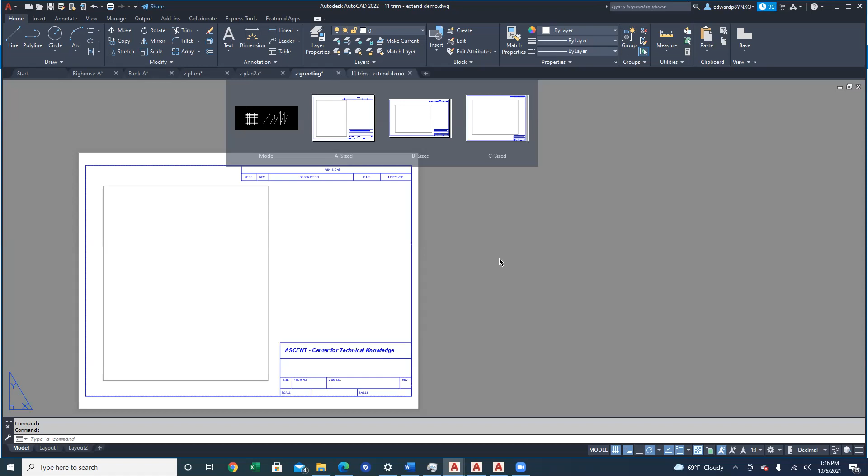So where's my trim and extend? Come on, be nice, be nice. We're going to look at trim and extend in a minute. Oh, come on, what's going on here? Third time's a charm, right? Mine's gone. You can do it. There we go. All right, so where am I?

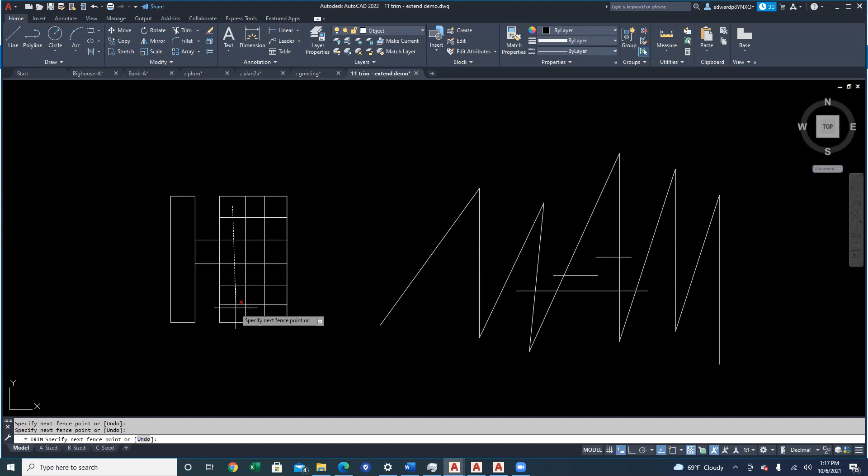Trim and extend, they're both in the same place. The new thing with trim is that you can just draw through. In the old version you had to actually pick. And in the older version, if you had pieces left that didn't cross any cutting line, you had to go in and individually pick them, end the command to get back into trim or delete and individually pick them. You're still in a remove sort of command now.

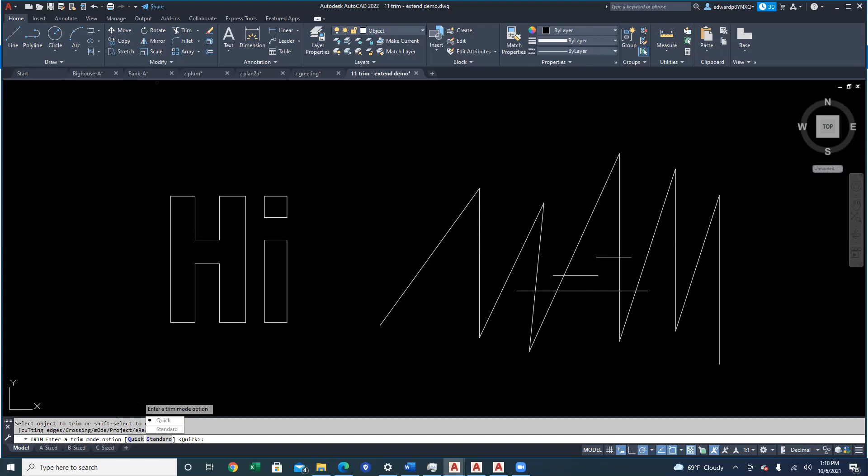If you don't like this, you can always come down here where it says mode, click on mode, and go back to standard. See, go into trim, go to mode, go to standard. Now you're selecting cutting edges and selecting what you're going to remove. With the old version, you hit enter and made everything a cutting edge. So I'll leave that there.

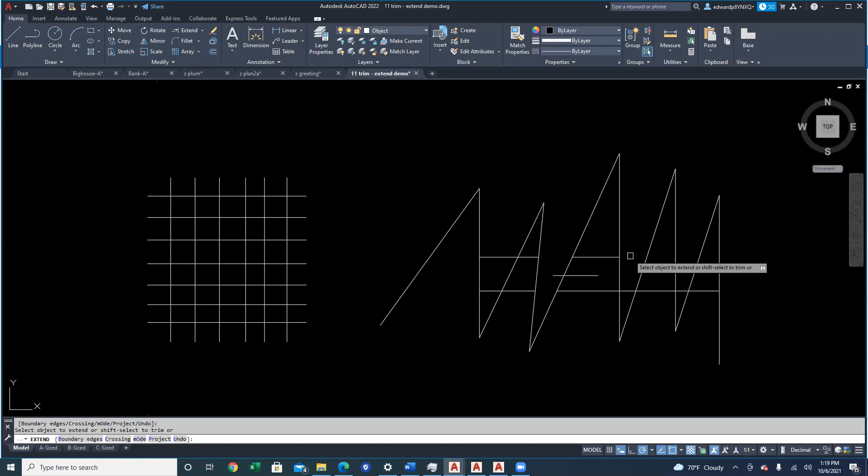The same idea works with extend. Everything is an extend-to line, which if you wanted to extend these all the way out, could be a pain. Another little thing you may not know: if you're in extend like I am now, and you hold down the shift key, it becomes the opposite and now it's a trim. If I let off the shift key, we're right back to extend again. It works the same if I was in trim.

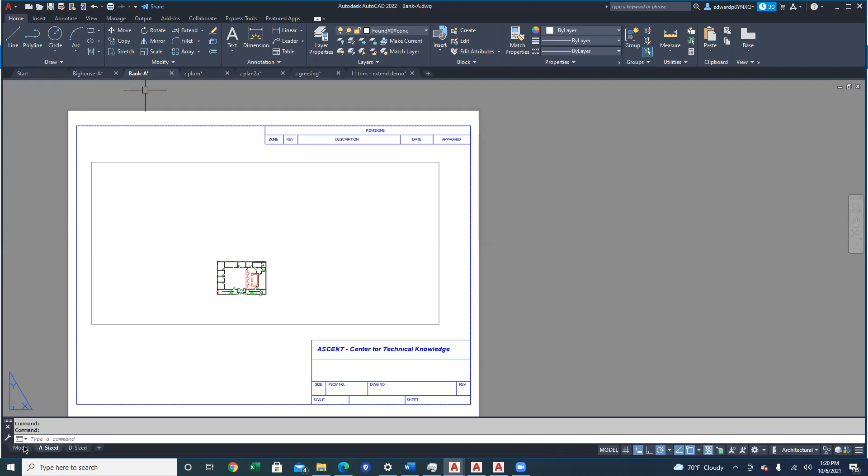Bank. All right, there's a couple of new things in the measure commands. They've added this quick measure so that when you click on that and move into an area, it recognizes objects and gives you the distances in between. So that's new, that's pretty sweet.

If you click in a closed area, then you're going to get the area, the volume of that area. And if you hold down the shift key, you can add to that. Prior to this, you had to come in here and do the area command.

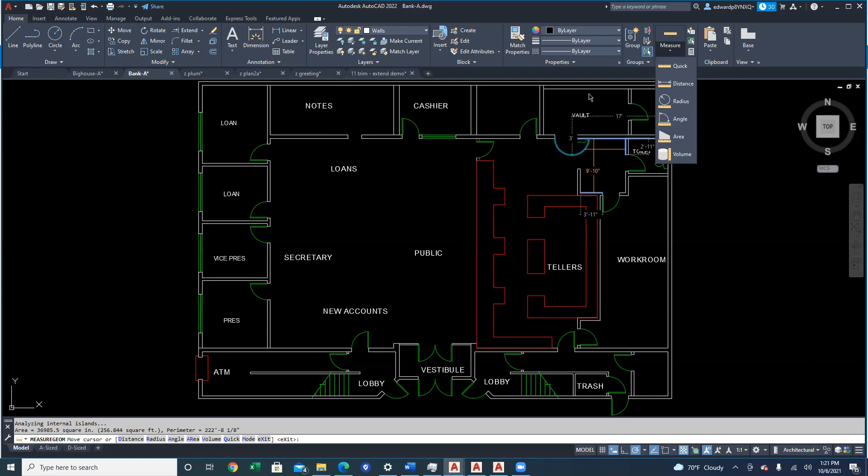One of the other things listed there is the XREF. So if you've got external references that you're using, you can go in and edit them.

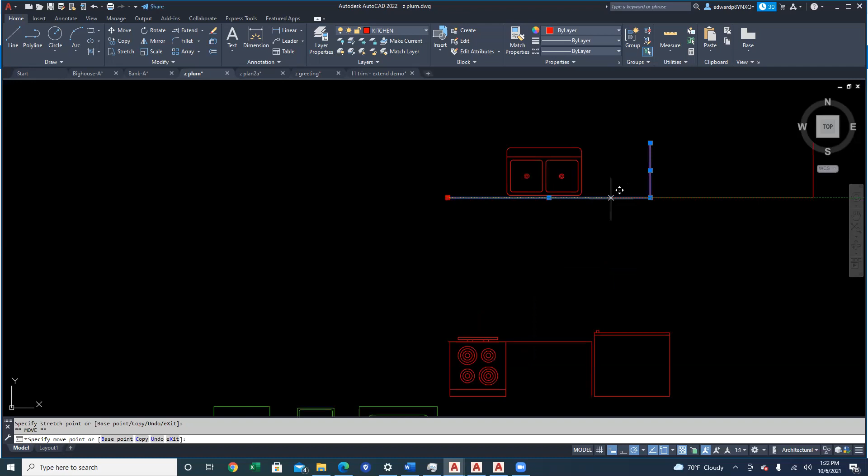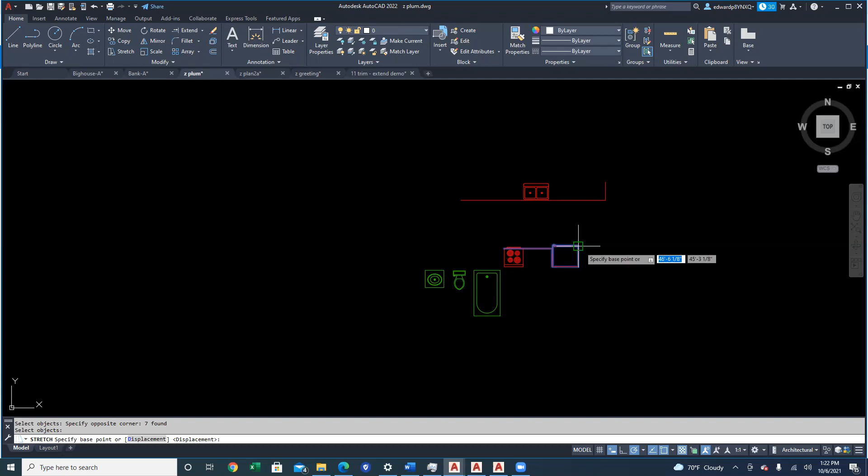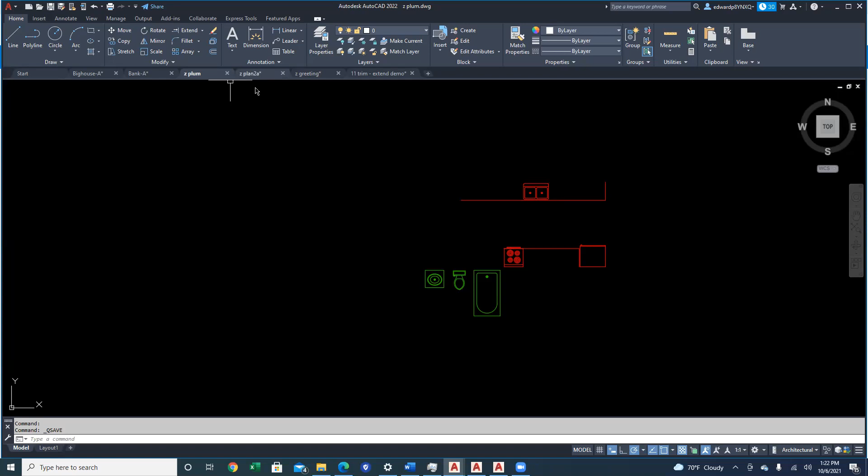I'm using grips. If you're not familiar with grips, it's one of my favorite tools. I should have the background for this. I don't. Let me go to Sketch. Okay, so you've been working on an external reference and you save it. Whoever is the supervisor, whoever is working on the overall plan, opens it up and gets this notification down here, and the compare changes is on by default. If you click on reload, you get into this window and it shows what has been changed.

So what was in the red, what is in the green - it lets you compare the two, and you can work between these. Let's say okay, and you can see it updated it, moved this stuff out a bit. You're wondering why it's not bright - it's because it's an XREF, so it's held down a little bit. You can change the amount that this shows.

What else? You've also got a drawing history. So if in the past you saved the file, you had one backup file. Now when you save the file, you have multiple files that are just listed automatically. You can click on compare, and you can see, turn on, turn off various things, and see what changes have been made, if any.

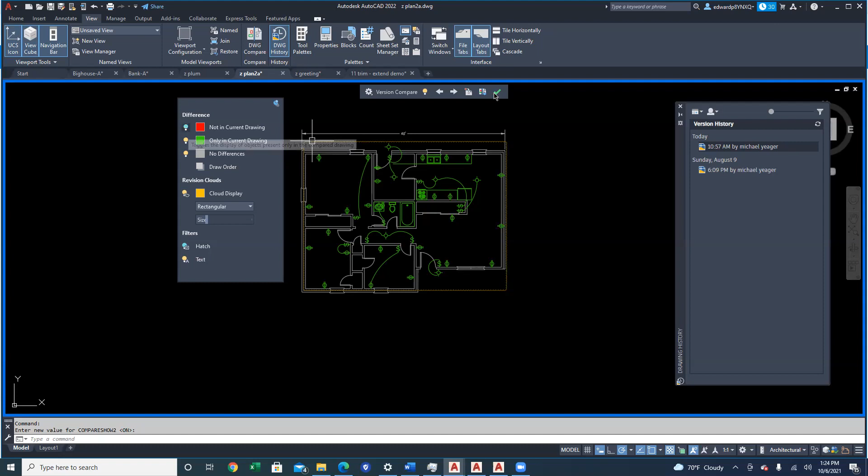And you also have a drawing compare, which does a similar thing. You can pick other drawings - so what was this? This was this.

Let's get out of this. The other improvement, if you want to call it that, is the blocks palette, which I'm still trying to get used to.

When you click on one of these, it opens up the palette, and you've got what's in the current drawing. You've got recent blocks that you've used, and I don't know how far back this goes. You can set favorites, and you can go to the library and open up files. One of my favorite tools is Design Center for dragging and dropping blocks in.

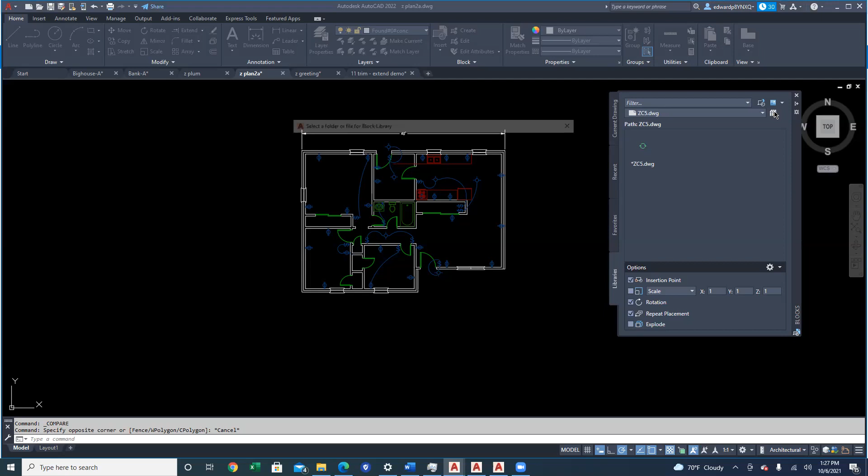So you can come into the library and find a drawing, basically doing the same thing from here. Maybe not. You can find any drawing and open it up.

The thing I don't like about it is with the old version, the old way of bringing in blocks, you brought in just the blocks. But with this, you're bringing in everything - you're bringing in the outline or the title block or whatever else is there. I don't know why this is taking so long.

One of the sweet things, and you could do this in older versions, was rotation. You could turn on rotation so that when you place it down, you could rotate it. But this is new and this is pretty sweet. So grab it and do here. Come on. Come on. Love it when it works.

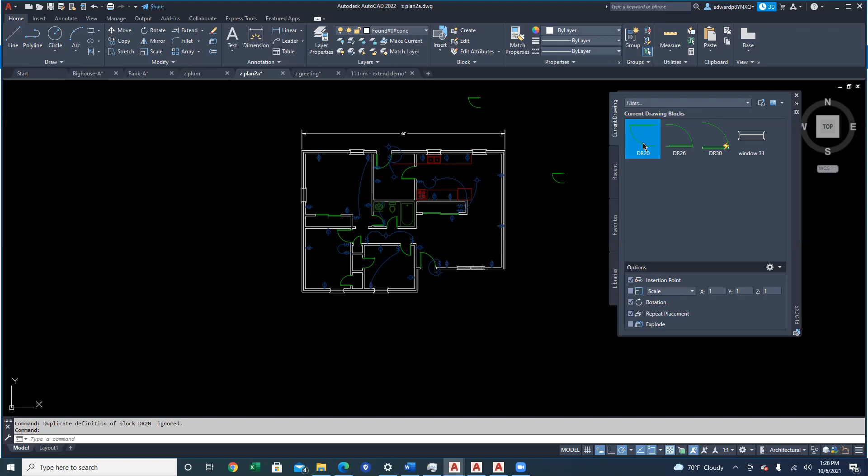There we go. Lay here, I don't know why. Should be right on my cursor so that I can place it down and rotate it. And this is on here. All right. Okay. Let me go. Something else.

I don't know if you saw a little message I got. I don't know if you get this, but it said that I'm running out of resources. One of the fringe benefits, and I'd say that tongue in cheek, of AutoCAD is that they take the RAM that they use when you close out some stuff - it doesn't give it up. I'm just going to close out some of this stuff. Maybe it'll help.

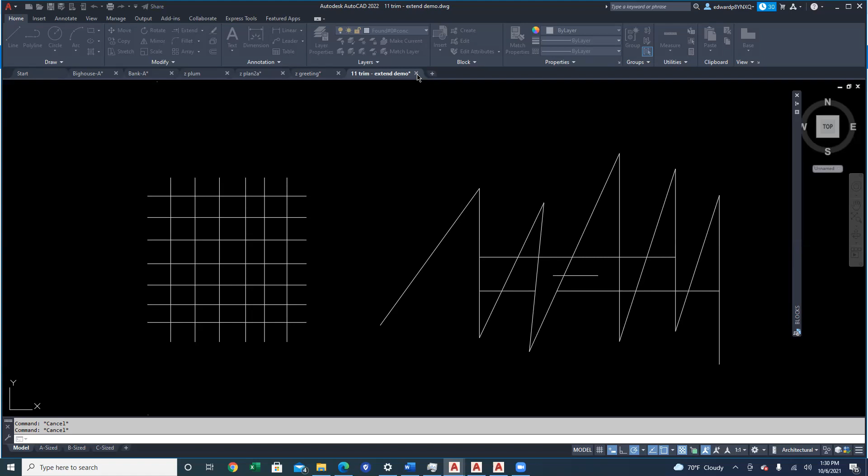Oh. Okay. Okay. Close that. Close that. Okay. All right, let's try something else. Let's go to, what was that? All right.

Let's look at this, start this video. This might be - I might be able to clean this up a little bit. This is one of the better ones that I found. CADD Microsystems isn't bad, so I may just start on this.

So one of the first things you're likely to see when you launch your AutoCAD 2022 is going to be the Start tab. And the Start tab has been here for a while, but it's been sort of streamlined - it's been modernized. Let me pull this up.

One of the things you can do that you might not be aware of is you can go into this little wheel down here and set the speed. I think a lot of these videos, the way they're recorded, the speed at which they're recorded just takes a lot more time. So you speed it up. You watch some of these.

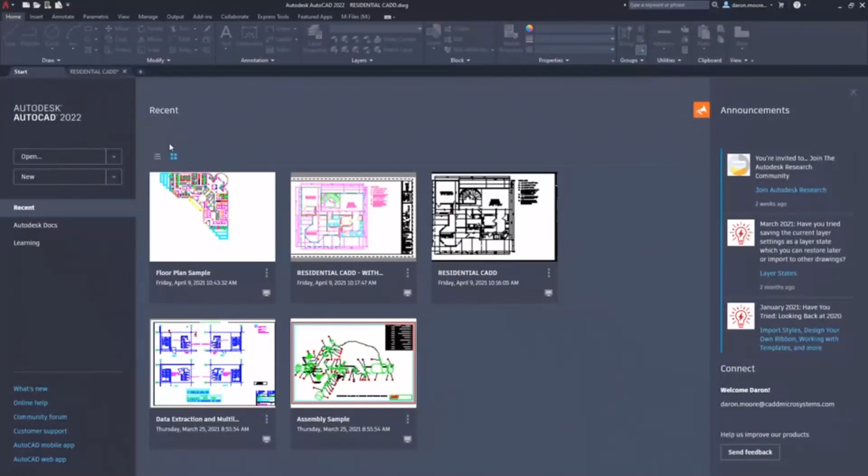Also, you might notice when I hover over a thumbnail, you'll see a little pin icon appear. That pin icon allows me to pin my recent document to the recent documents area. If I go over to details, same thing - if I hover over one of the details, you'll see a little pinned column. I can hover and pin this. A lot of the projects we work on are continuous, ongoing for days, weeks, months, so the ability to pin your document to the recent area of your Start tab can be pretty convenient.

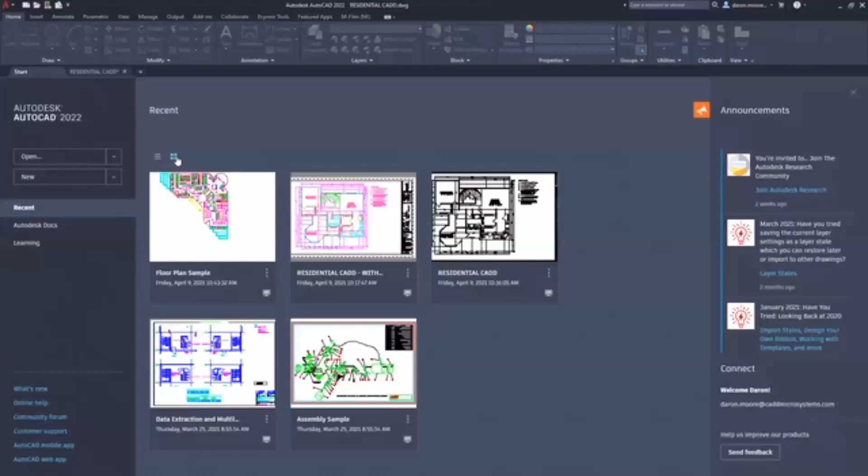You also have the ability to open, on the left side underneath the heading Autodesk AutoCAD 2022, the open button. If I push this, it brings up my select file dialog box, or there's a drop down arrow. If I click the drop down arrow, it opens up and shows me some options. I can open files, open a sheet set, or explore some sample drawings, some of which are shown here already.

Below that is the new button. If I click on new, it'll open up a brand new drawing using the default template, or I can use the drop down arrow and use the default template, browse additional templates, or get more templates online to make my startup a little quicker. I can also create a sheet set - I always find that hard to say.

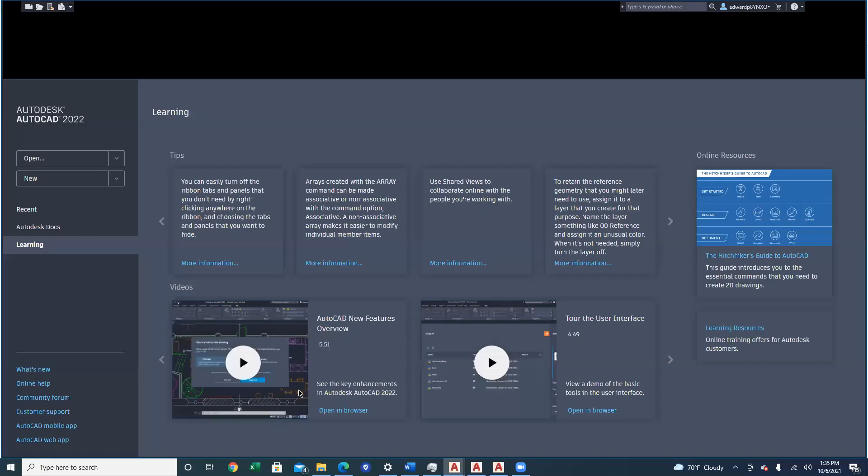I don't know why it's blurry. I guess it's something with the feed and the amount of RAM I have used up.

So if we go to recent, it's going to show all the drawings that are there. Again, you can look at it in different ways. This isn't new - you've been able to do this with other versions in the past. I mean, this is 2021, and it was just arranged a different way.

It's like hemlines and seasonal things. They've got to change in order to sell a new product. So they're changing the way it looks, but it's really not anything new.

2019 is saying I had 2019 open here. It looks the same. 2021, they just changed it a little bit. 2022.

So where am I? You can pin any of this stuff. It just keeps it from being pushed out of the buffer. There's, I don't know how many, 8 I think, in the buffer. The oldest one gets pushed out unless you've got it pinned.

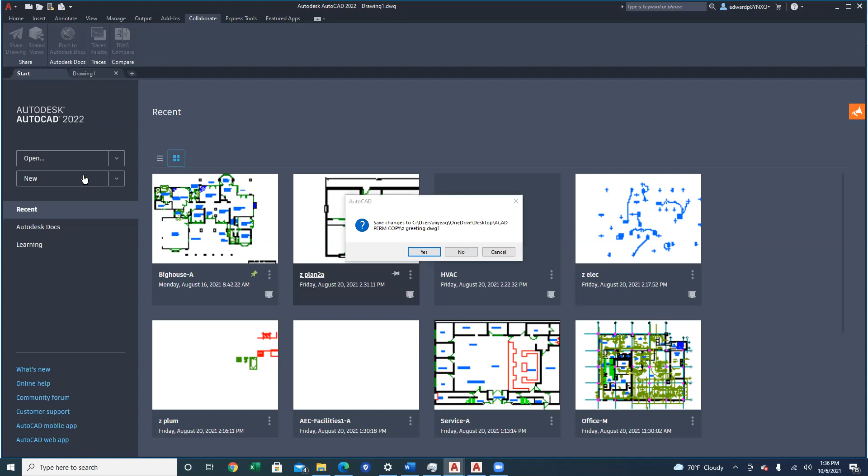You can click on open and open an existing file. You click on new and you get a new file. No, I don't want to save that. No.

You can create a sheet set using that new area there. They're talking about sheet sets, and if you look at the Autodesk programs...

Heading down the line here, we have something called Autodesk Docs. You have the ability to open up your Autodesk Docs if you've connected to it - that's another one of those subscription features, a separate subscription feature. I could open up and see drawings that I may have shared with somebody through Autodesk Docs, which is Autodesk's cloud environment for drawings and data. So I could see drawings that I have shared or had.

A little problem with my feed here now. Damn.

Okay. Wonderful. All right. Well, something unusual just happened. Let's see. What I'm going to try and do is turn this off through the Task Manager so I can get back and open it up again.

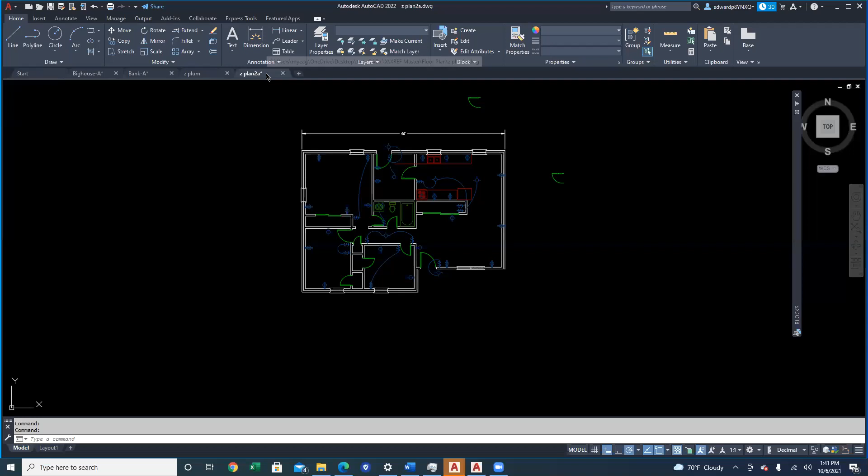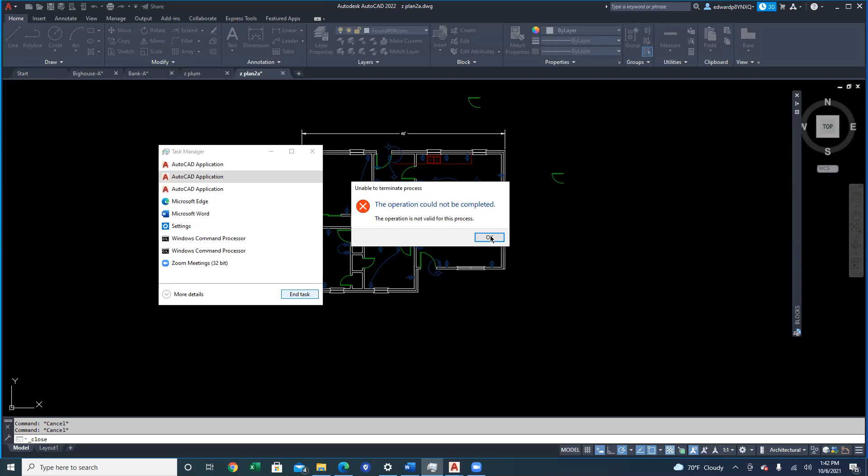So with Autodesk Docs, you can go out and share stuff. No, I don't want to save it. Okay, open this up again, see if that helps. Doesn't help, that's for sure.

Shared with me, below Autodesk Docs, is the learning area. If I click on learning, it changes the landscape here where I can see the top row with a bunch of AutoCAD tips. If you like to grow your knowledge of AutoCAD while using it, you can come to the tips area and learn a few new things.

Below that, the next row is just videos in general, and there's a scroll arrow that lets you scroll and see additional videos. The initial one is a new features overview, which we're in the middle of right now, plus tour the interface and so on. This features overview is a little different, so you should probably watch it to get a different perspective.

Videos will help you get up and running. Also presented are online resources for training, for people who offer online training. I don't know how we can get ourselves listed there—we probably should. But there are varied resources for learning information and getting trained up.

Let me go back to that recent area. Below we have what's new—you can learn what's new in AutoCAD. Access help, go to the community forum. The forum is a great place if you're having issues with your AutoCAD; you can share experiences you're having.

I'm seeing this in my AutoCAD—what is happening? And a lot of times people like myself will try to write answers, try to help you figure out what's going on with your AutoCAD.

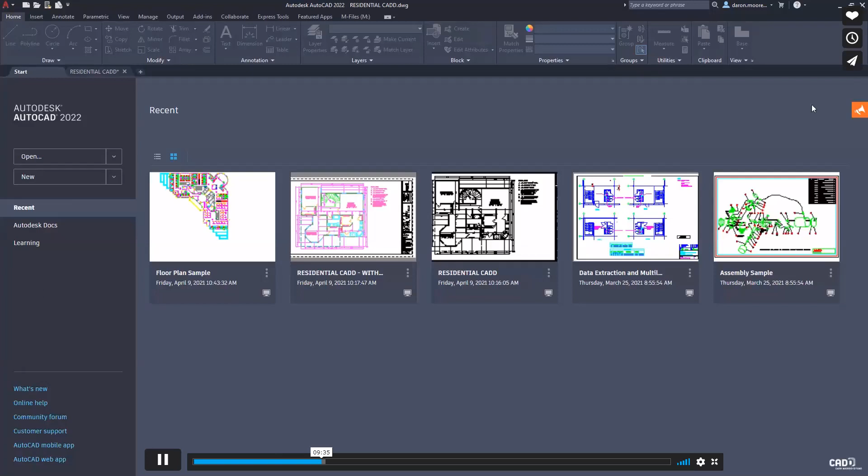Then I want to point out one final thing: the send feedback button. The earlier versions of AutoCAD's Start tab had a send feedback button, and I found it by accident. I was just goofing around on the Start tab, saw send feedback, and pushed the button. It basically allows you to send an email to one, or a very small list of, people at Autodesk where you might have an idea about the software.

I offered an idea. Let's get back, see if AutoCAD is open yet. No, it's still trying to load, looks like. Let's get back here and look at some more of this.

About the trim and extend commands—I wouldn't say they used my idea exactly, but if you've been using AutoCAD since 2021, trim and extend have changed. So maybe my suggestion wasn't exactly what they did, but maybe it helped.

Oh, you go there—so do send feedback, make it constructive. Don't say, hey, make it better. Just say, hey, I wish you could change the command prompt for this, or can you add that?

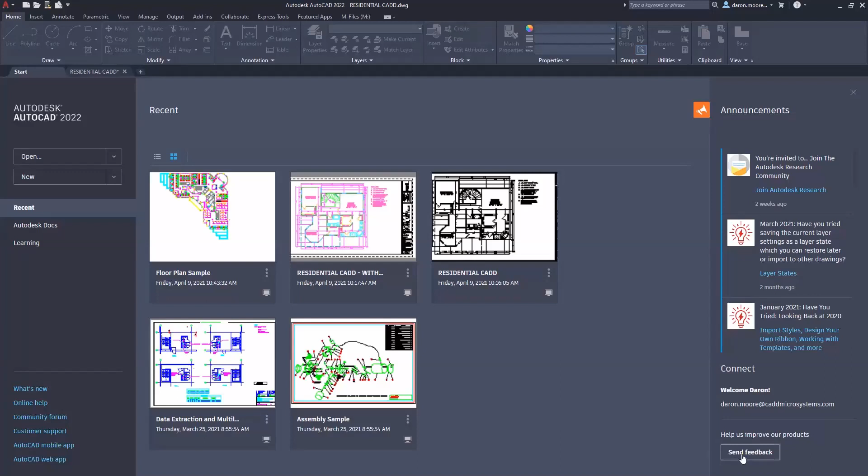And all our feedback, our positive feedback, goes to help make this a better platform for all of us to use. So that's your Start tab, and hopefully you'll be able to take advantage of that.

Moving on from the Start tab, I'm going to switch into a drawing that I opened up earlier. In this drawing, the next thing we'll talk about is one of the new features called Share Link.

Share Link is accessible on the Quick Access toolbar or the Collaborate tab. I think Collaborate is a theme that AutoCAD has been supporting for a while, and it's just continued to be supported. A lot of folks, myself included, are working from home, so the ability to collaborate online is beneficial.

So again, share link. If I want to share a link to this drawing, I can either click share on the Quick Access toolbar, or click share on the Collaborate tab on the share panel. Either way, it's going to give me the same result. I'll click share, and it's going to bring up a dialog box. It takes a second, you can see the little buffering wheel. Share a link to this drawing.

I have two options. One is I can share a view-only version if I want to share this with somebody who I don't want to edit the drawing. Maybe it's a client and I'm showing them, hey, here's where we are with your floor plan so far. I could give them a view-only version of it. Or if I would like my client, consultant, or collaborator to be able to edit and save a copy, I could choose this option instead.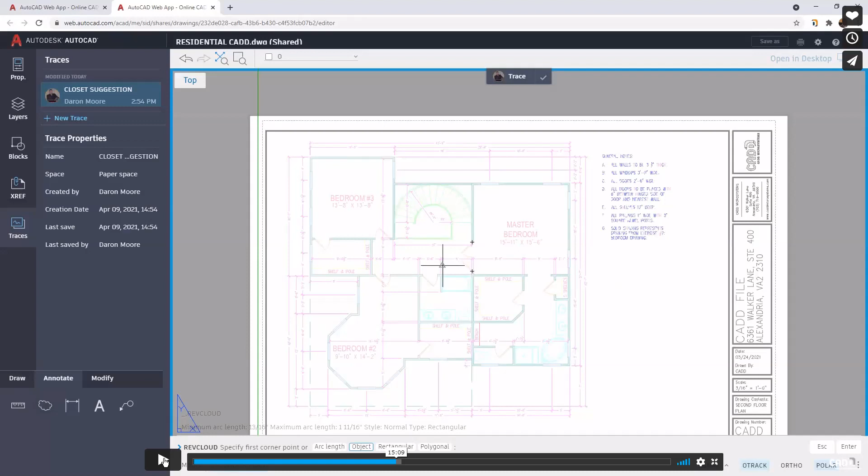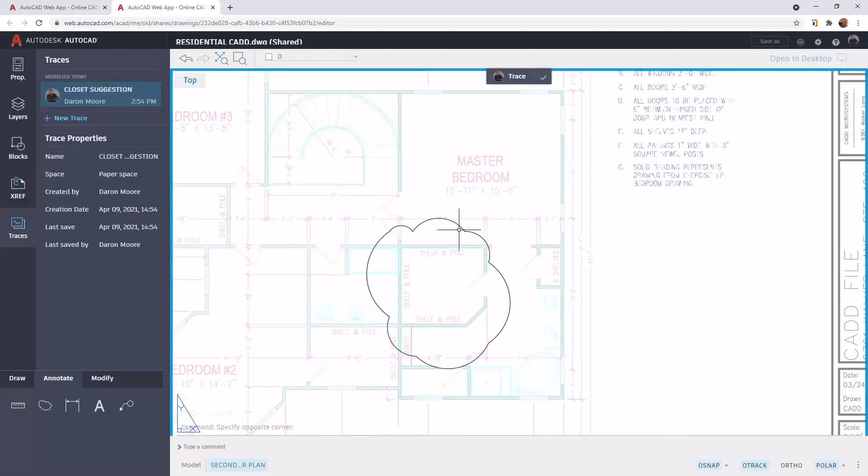So before you place it, you can come in here and change the arc length. The closet in the master bedroom, that's pretty big, like so. Then I'll add some text, and you'll see what I'm talking about with the fonts. If I go multi-line text, okay, this is a huge piece of text. Let me stop this right here. I'm going to do this from model space because the text that I currently have as my text style is model space based.

So I'll go to the Model tab here. There we go, all right, zooming back in, I'll go to my revision cloud. So here's my revision cloud around the closet, and then I'll create some multi-line text.

And I'll just say, you know, my wife would like this comment. You can make the size of the text bigger here. Walk-in closet, something like that. I'll just click check. So there's the information - I'm sort of making a suggestion to a team member.

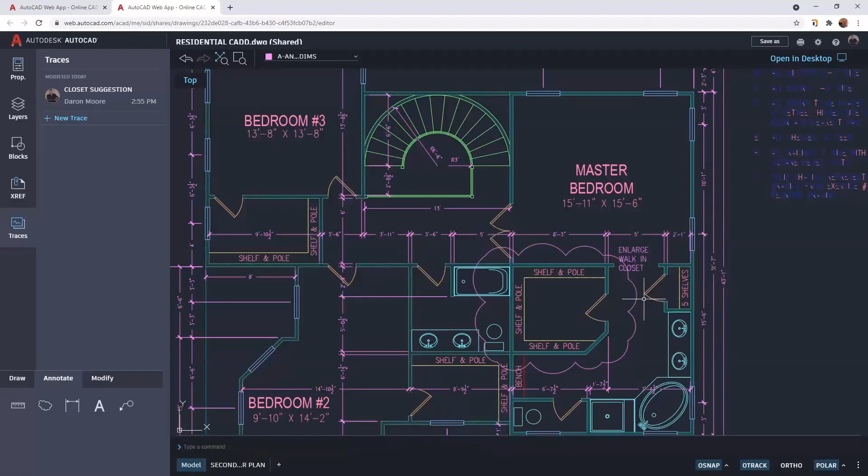Now I'll do the save as. I'll go save as, and I'll just save it to my AutoCAD Web and Mobile, and I'll just call this closet suggestion, or say size, just to give it a unique name. It's closet size suggestion. I'll save that.

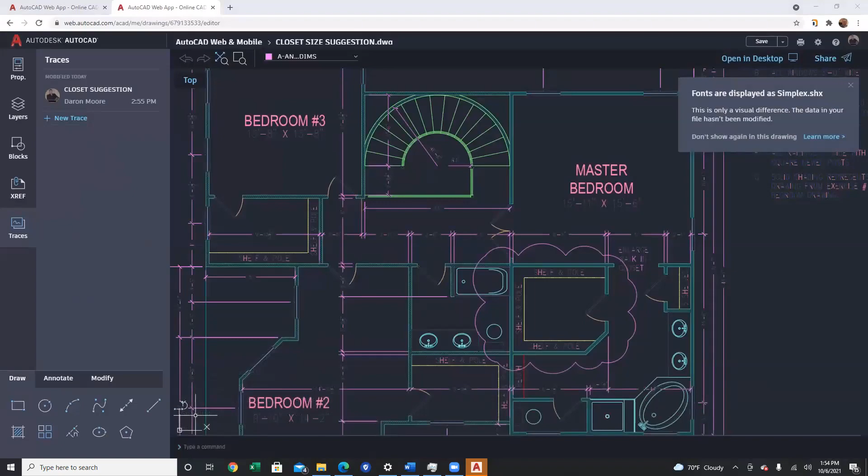Okay, so that was my trace. That was the command trace. And then what I'll do is go back to my desktop version of AutoCAD. I'll get rid of this dialog box. Now I want to see what my collaborator, my counterpart, said about the link I shared. I'm going up to my quick access toolbar, and I'll click Open from Web and Mobile.

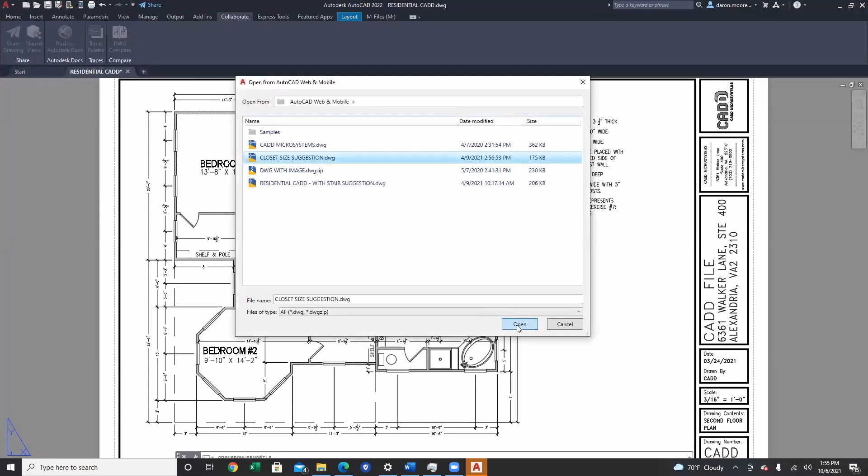And here's closet size suggestion. I'll click on this and click open. All right, so here's this drawing, and you can kind of see there's the little markup there.

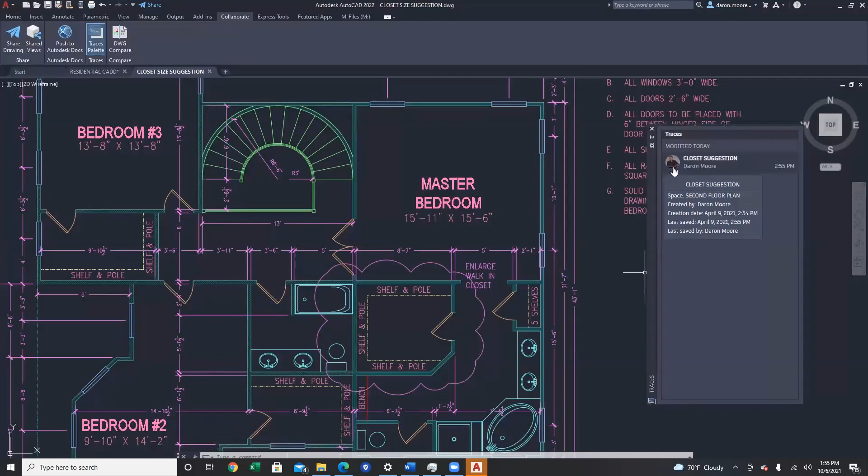Now on the Collaborate tab of the ribbon on the desktop version, there's a Traces panel. If I click on Traces, that opens up a Traces palette, and it will tell me - there's my image, I'm the guy who made this, but if someone else made this, I might see their avatar. I can click on Closet Suggestion, and it kind of highlights it. It sort of puts me in the mode to see it.

You can kind of see almost like you're seeing it through tracing paper. The tracing paper is now on top of the drawing. You have a little toolbar, and again, the toolbar allows you to see who the avatar is - it's very small, but that's me. Then I have the ability to sort of toggle the draw order.

If I click on front or back, now the trace is behind the drawing. Now the trace is in front. And if I make my changes, I can, when I'm done, just hit the little check mark and say okay, I'm done making those changes. So this is kind of another way to collaborate or communicate with other AutoCAD users - your trace and Traces palette.

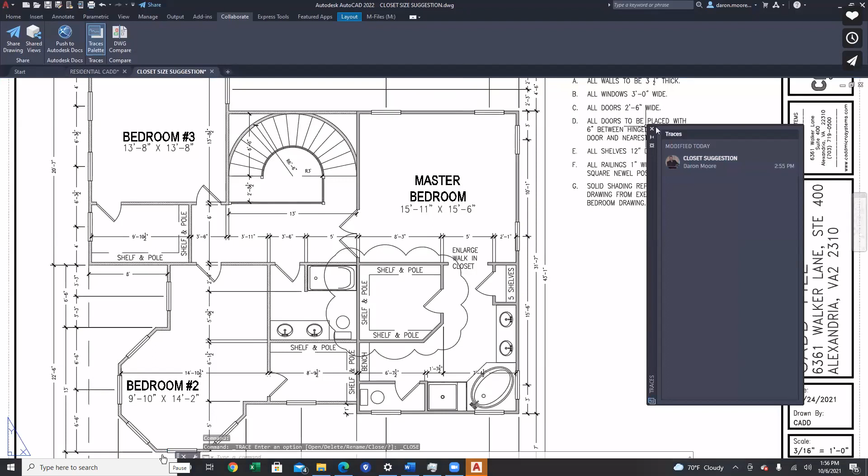Typically this would be a red line drawn right on top of the drawing. The drawing would be shared back and forth, and this would just be right on top of the drawing. So the trace has an advantage.

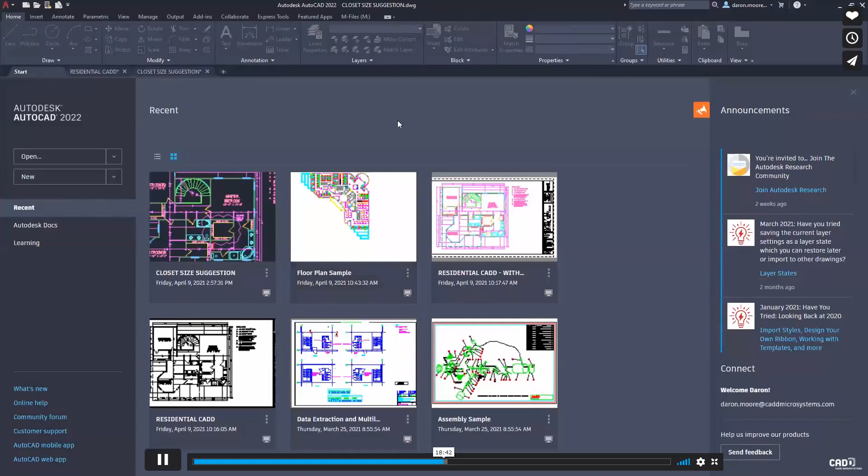This is one of my favorites, a command I'm pretty fond of. I'm going to open up a different drawing for this - a drawing I think was set up exactly or expressly for this new command. This is a sample drawing, and I'm going to open it read-only. If you've had AutoCAD for a while, you've seen this drawing for a while.

This is a command called Count, and the Count command is accessible on the View tab. There have been other ways to do count before - Count is sort of like a data extraction, so this is an improvement. It's in the pretty ribbon suite, it's palette based, and on the Palettes panel, here's the Count button.

I'm going to click count, and this drawing has not been saved, so of course it's read only, but I'll click count, and it gives you a palette. The count palette shows all the blocks in the drawing, with abbreviated names like chair, 7. Computer's not abbreviated, but it shows me all the blocks in this drawing.

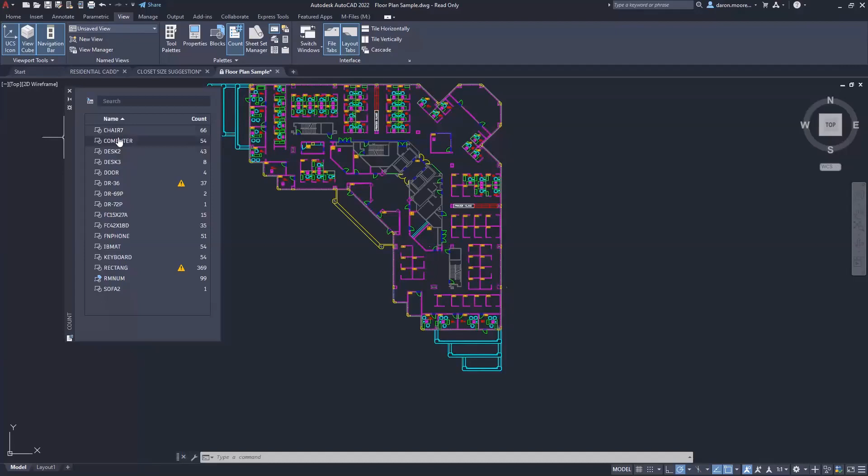If I right click over any one of the blocks, let's say computer, I can review count details. It shows me where these computers are, up in a little toolbar similar to the traces toolbar, and how many there are. I can get a little bit of information, like there's 54 computers.

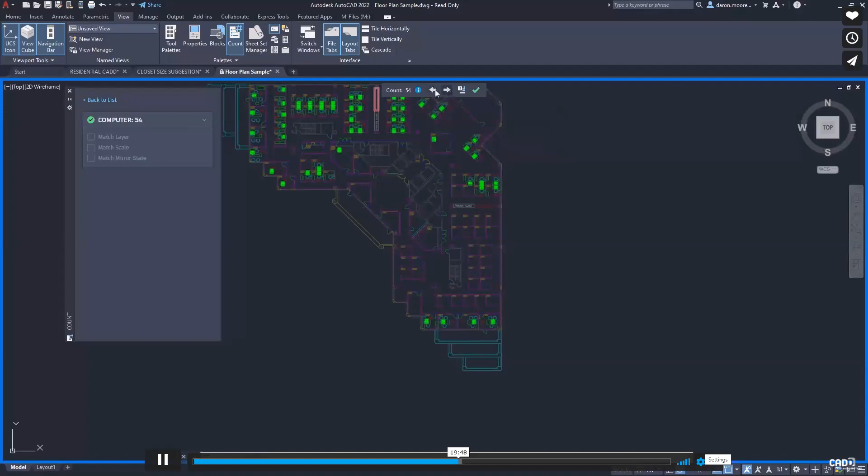If I use these little left or right arrows, they should zoom me in so I can see where they are. If I keep hitting next, it'll show me each one, and you saw them highlighted when we were zoomed out.

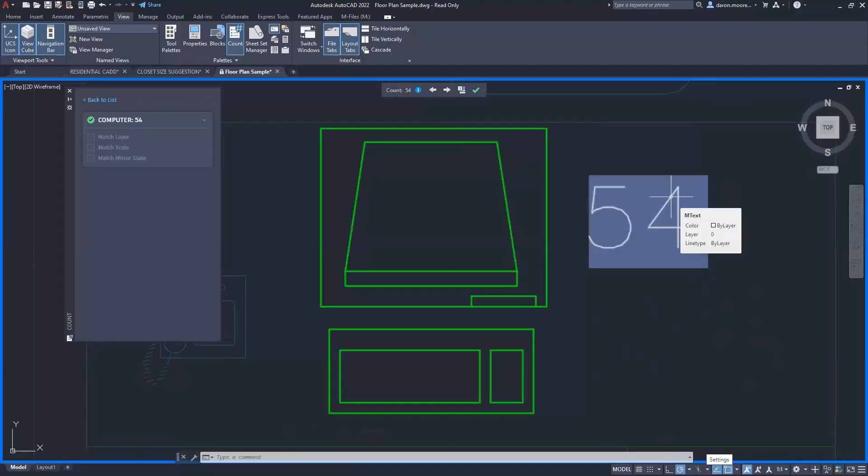The next little icon allows me to paste or insert a count field. I'll click count field. We saw there were 54 computers - my field mask seems very dark, but there's 54 computers. This is dynamic, so if I were to add or remove any computers, that count field would update.

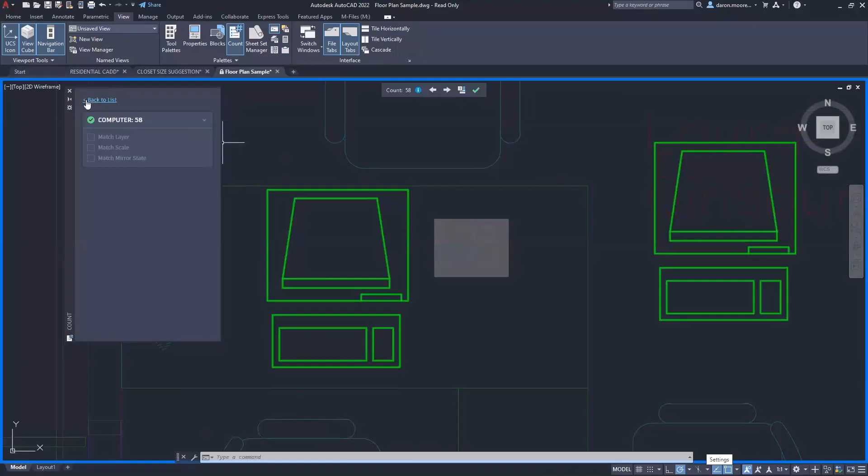Let me left click, right click, copy selection, and make a few copies, so we have a few computers laying around the office now. Going back to that field, if I use regen, it should update and show me now there's 58 computers. This is a cool tool in my opinion - I've used the command called bcount for years. Let me go back to the list, and that's kind of exciting for me to see.

You'll see a couple chevrons here, little triangles of enlightenment - if you use AutoCAD architecture, you may have heard that term. If I click on this triangle, it tells me there's a count error, and if I click on this overlapping object, it's telling me there's an object overlapping.

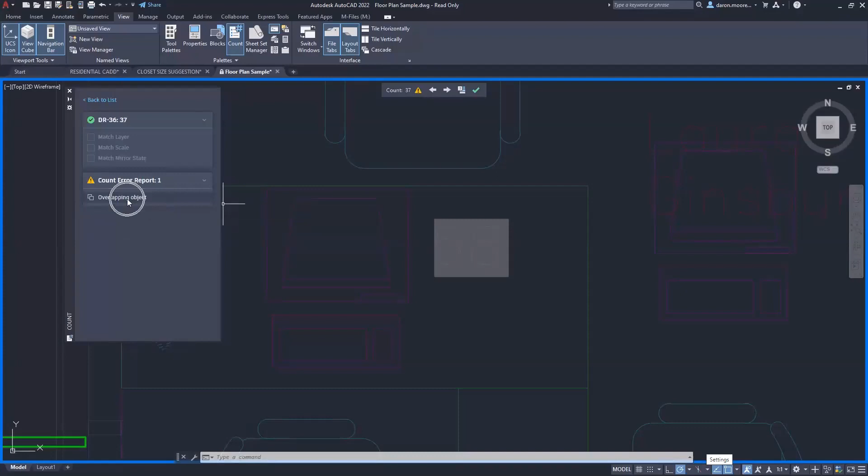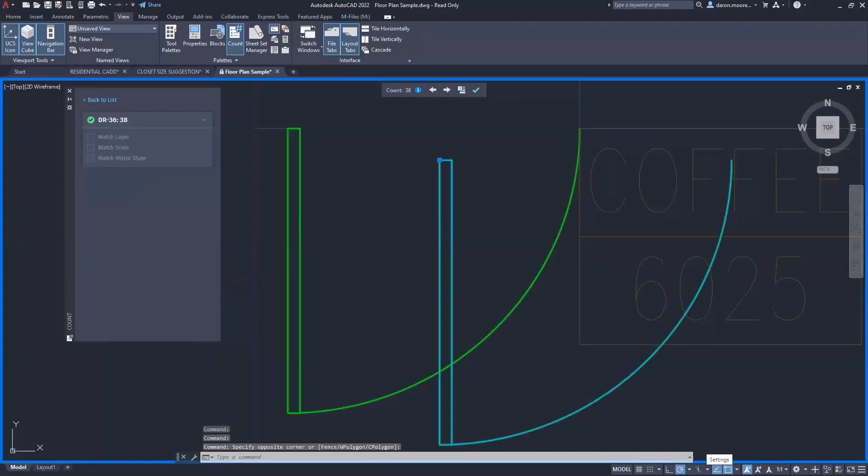I'll click on this - it zooms me into where AutoCAD has perceived there are 2 doors superimposed over one another. If I click on this door, according to my readout there's 37 doors. But if I top click that door, I'll pull it out of the way and delete it - let's say I don't need that. Now there was 38, there's 37 now.

That may have changed the count, but now I've got a more accurate count. It lets me know where I have duplicated objects, which used to require a separate command back when I was using the bcount command.

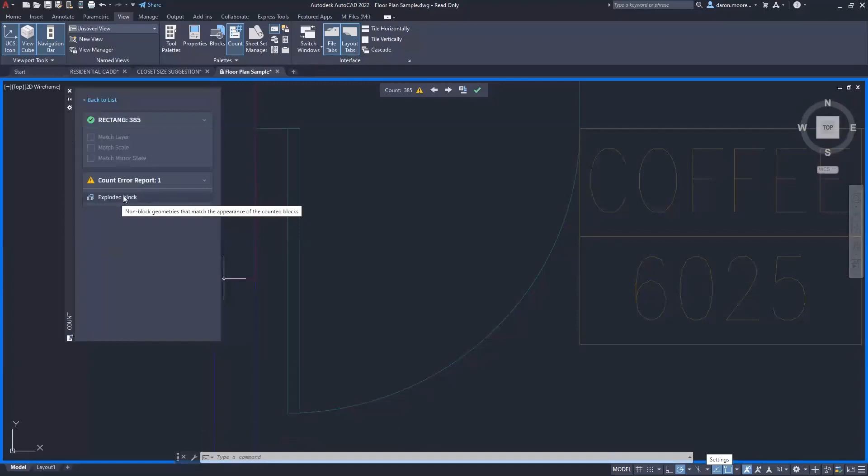This block called rectang also has the little triangle of enlightenment next to it. I'll click on this, and it's telling me there's an exploded block - I don't even know how they know this, it's amazing to me. The line work we see here was a rectangular block that would be a column - you can see it's on the furring layer. If I need that to be a block, I can delete the exploded line work and just reinsert the block. So it gives you some really accurate data.

Let me go back to the list. Finally, at the top of the palette there's a little button - the tooltip says create a table containing these selected objects from the count. If I click this little table icon, it allows me to check which blocks I want to see in a table.

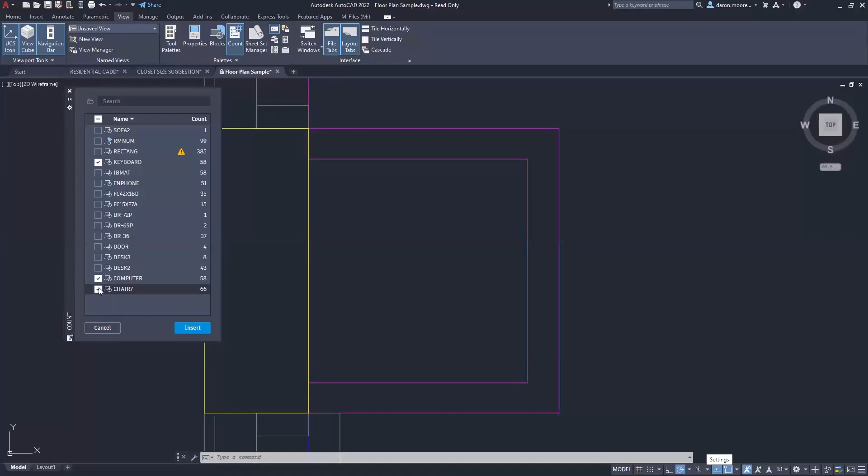Let's say I want to see how many keyboards I have, how many computers, maybe how many chairs - where'd the chair go? Right there, chair, I'll go chair. Let's say that's all I'm interested in, I'm more of a furniture equipment person. I'll go ahead and click insert.

I'll zoom out some so we can put this somewhere neat - let's say right here, this is kind of neat. Left click, and again it gives me a dynamic table that shows how many keyboards, how many blocks in general I have of a certain type. Adding or removing these blocks will update this table because it is dynamic. So that is one of my favorite things ever, the count command.

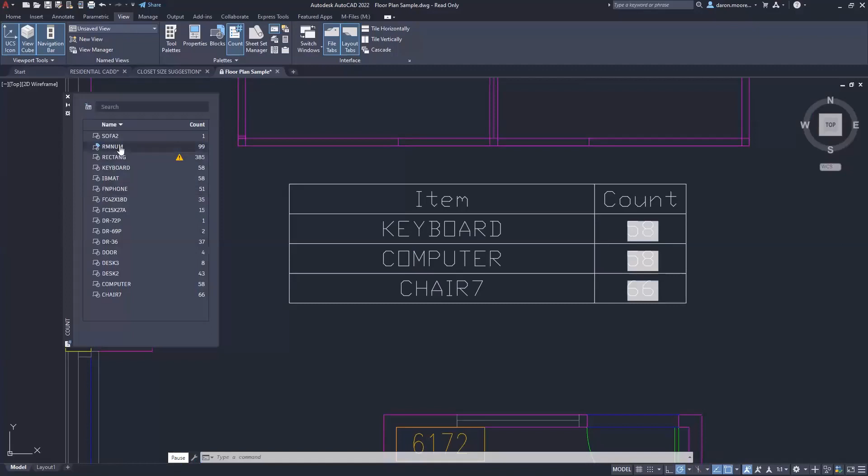I'll do one more right click. There's a number of little options here on the right click menu. Let's go back to computer. Right click, click layer, and it tells you what layer it's on. It's on the CPU layer. Right click again.

You can see how many are in a mirrored state, what is the scale of the majority of these things. The CPU is a scale of 1. So it kind of allows you to quickly get information back from your drawing.

And that's your count command on the palettes panel of the view tab. I know I've gone a little long on this one command, but let me show you one more thing. I'm going to go to the residential CAD drawing.

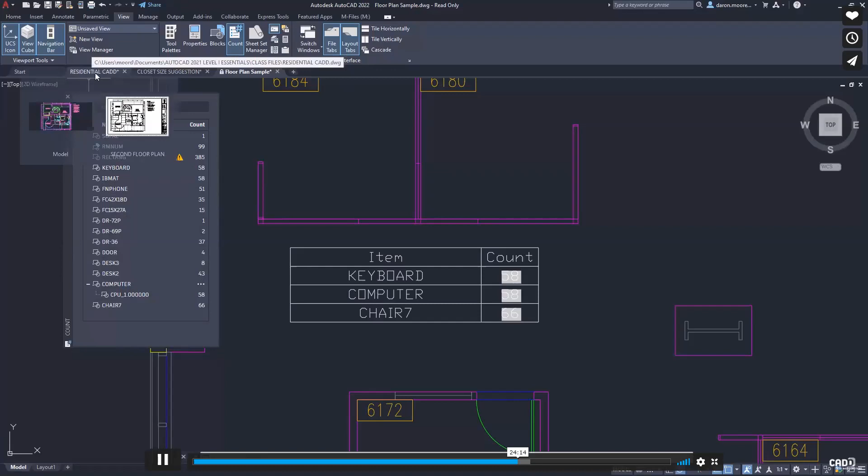I change drawing, and the count instantly changes. I don't have to ask AutoCAD to do that. It just says, hey, you're in a new drawing, guess what, you get different blocks, and it shows me similar information. Here are the blocks in this drawing, and if there are issues with the blocks, it'll show those issues to us pretty quickly. So that's your count command, one of my all-time favorites.

Another handy feature is floating window. So let's see if my AutoCAD is up yet.

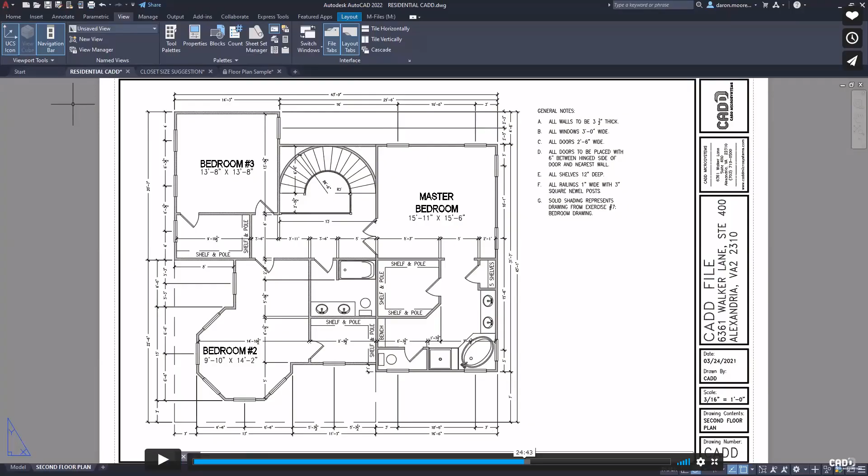Yeah, so no, I don't want to recover. If your system ever crashes, you're going to get this recovery thing over here, and you can go back and pick the files that you had open, or you can close this out. Let me do this, close this out.

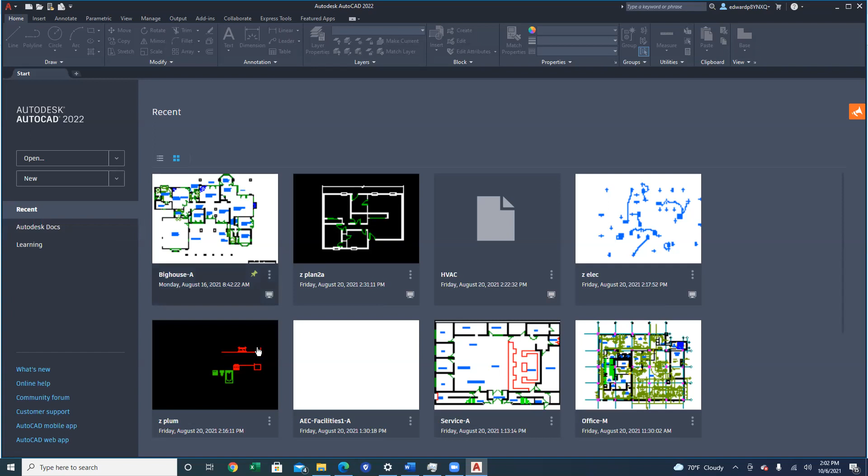Okay, so a couple of things. We looked at the recent. If we go down to learning, you've got tips up top here, and you can scroll through these. There's a couple of them that I think are interesting.

You can set command aliases, and you can trim down what you have up here. Let me just open up a blank drawing.

This is how it opens up by default. It's got the grid on. The command line is floating. So you type the command in here, or select the command, it displays it above the command line here. You can grab this end and bring it down, and you can dock it at the bottom, or dock it anywhere you like.

You've got all these tabs across the top. There's stuff up here that I don't use, that I don't want to have to sort through to get where I'm going. So you can turn some of this stuff off. And that's what the tip was talking about, you can turn it off.

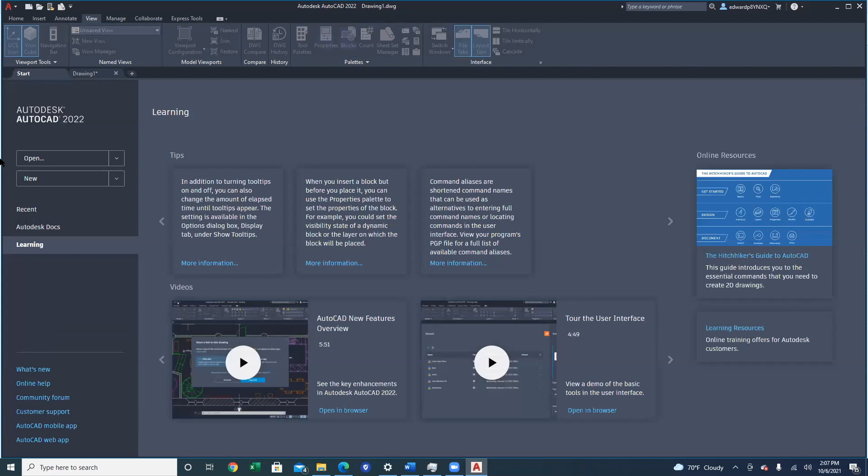Options display. So if you go into the options, sometimes the tooltips get in the way and I don't want to see them all the time. So you can turn off show tooltips. You can set the increment for when they show, and you can set a couple of other things here.

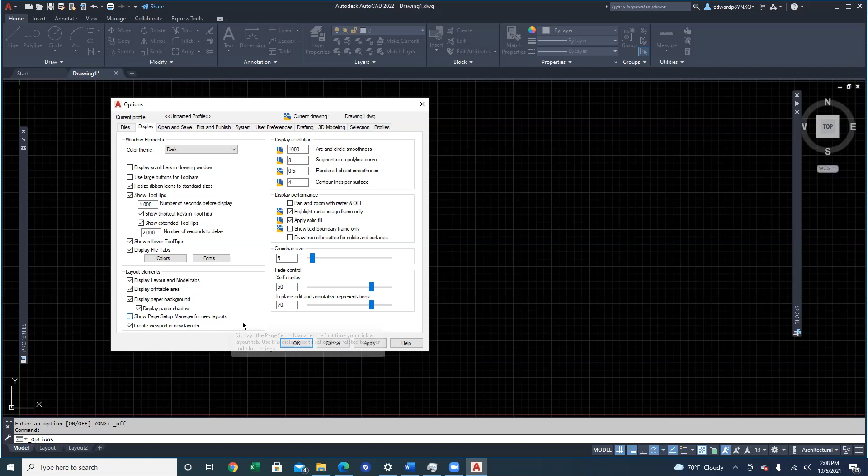If you're working with dual monitors, you can pull a tab off and move it to another monitor, so you've got floating windows. If you want to put it back, you can just move it back over the tab and it places it back.